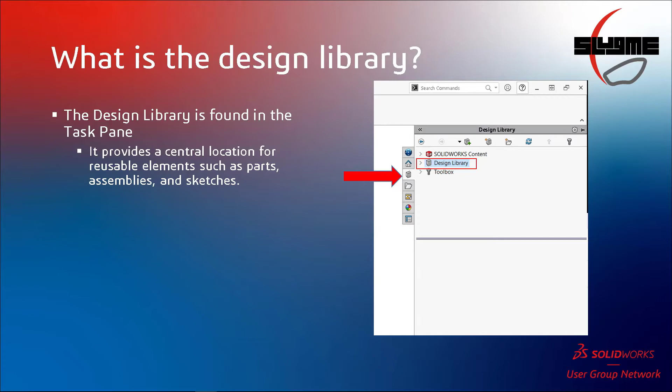So with that, where is the design library, or what is it for that matter? Well, it's really just a location that is found — a folder that has subfolders within subfolders — found in the task pane, along with the SOLIDWORKS content section with the toolbox. You should see the design library out of the box. But if you don't, I'll show you how you can add that, or you can even add your own additional folders. All it is, is just a central location where you have all your reusable elements, such as parts, assemblies, sketches, annotations. You can also customize it as much as you want. You can have multiple folders, directories, and then share it with your colleagues, with the different users within your organization.

There are some file types that do not belong there, that are not recognized. I'm going to talk about which they are as well. But let's concentrate on what we can use, right?

So what if it's not in the task pane? What if you open up SOLIDWORKS, you went through a change or a modification to the installation, and you no longer see it? This right here is the default location where you would find the design library. It's a folder that already has a group of subfolders, categorized by annotations, features, parts, assemblies. We even have some additional tools for routing purposes, for sheet metal purposes, etc. So there's some different examples, and if it's not there, you can easily just add it.

There are a couple of ways to add the location of that default design library. If it's not there, this is a good way to do it using the Add File Location button. You simply browse for the directory, select the top level folder, which is Design Library, and you'll be able to see it there. There's another way through the Options menu to System Options, which I'll show you later as well.

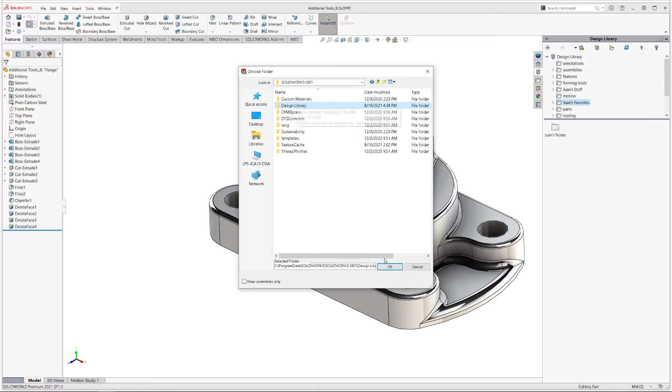Now, as I also said, if for some reason you go through an update, an upgrade, swap machines, or a new version of SolidWorks, and you don't see the design library here, you can simply add the file location of that original directory, which is under program data, SolidWorks, whatever version you've got, and then just point it to the top level folder. Hit OK, and then you'll see that directory here.

You can also access or assign this location under your tool options.

Under file locations, there's a section here for design library, and you can see it's the same directory there. So yeah, you can have multiple. You can also add a network or a shared folder, so it's up to whatever you prefer.

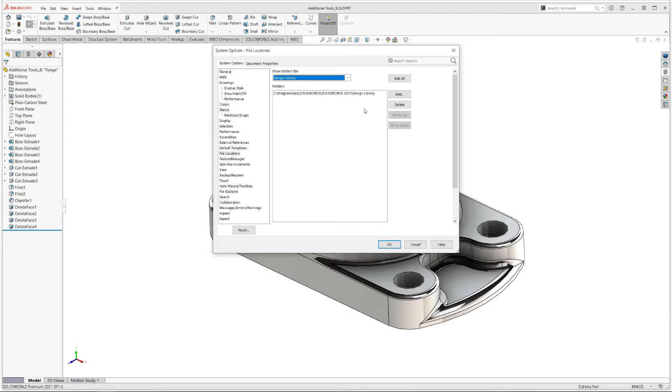The idea here is to have access to this folder that already exists. You can have a little pre-created group of files, and you can use those or derive some from there. All right, so what are they used for?

So for instance, if we go to the annotation section, here you can store any sort of symbols like your tolerance information, your weld symbols, your surface finish symbols, any notes for that matter. I'll demonstrate how you can use those in a drawing environment.

So you can quickly save them there, and if you need to use them, you can simply drag and drop them instead of having to go and find them. If it's something that you commonly use, you can simply go in there and assign it. Of course, here I'm putting it on a surface of a 3D model.

If it's a note, you can go ahead and save that into a note, or create a text here, add a note, and then just save that into that folder. I'll go ahead and demonstrate how to do that, but it's something as simple as adding those files there.

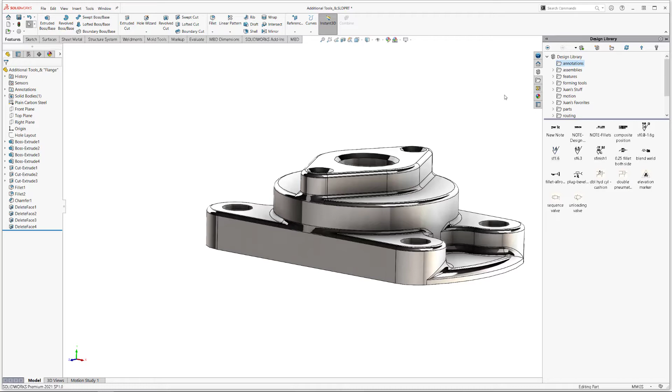All right, so let's take an example. How can we use this? Well, if we go in there, something very simple - if I go in and create a sketch, for instance, here I'm just going to go ahead and create a simple block.

I would extrude like this, but I know Toby Snart is watching, and he always makes sure that his sketches are fully defined, so I don't want to go ahead and upset Toby. So here we go, we got a fully defined rectangle there. Just simply going to go ahead and extrude that.

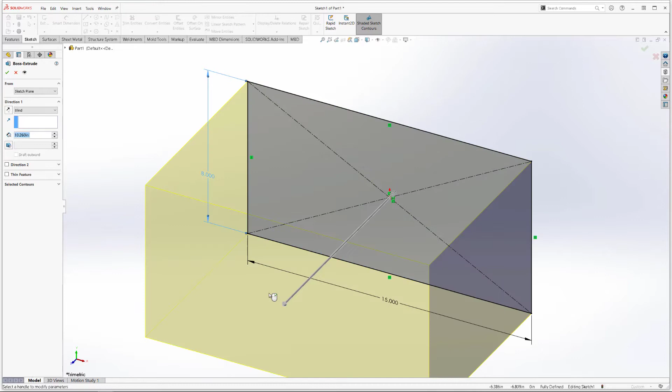Again, I'm just using this as maybe a foundation here as a way to save some geometry into the library. I'm going to save a sketch. You can also save a note. You can also save a feature.

So I'm going to demonstrate using this block. So what do I do here? Well, I want to go ahead and create a sketch on this surface right here. Okay, it is important on the surfaces that you create.

I'll show some examples where if you do not want to have any external references, if you want to go ahead and be able to locate the feature or group of features, or if you want to locate the sketch or the annotation, it's important that you think about those external references.

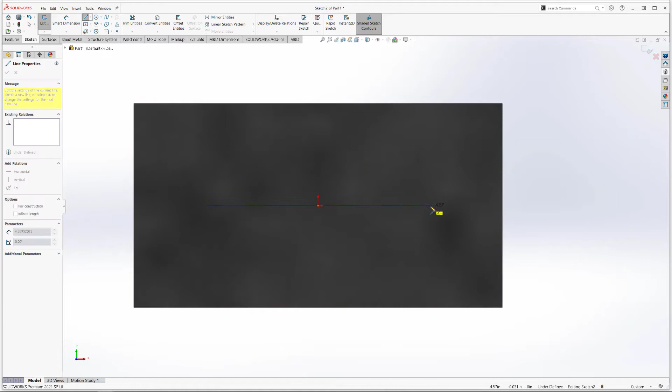But to make things very simple, all I'm going to do here is just simply create a midpoint line right from the origin. And again, want to make sure that we dimension this. Smart dimension, let's make that 10 inches. And then I'm going to make that construction.

So here's a little quick trick here. I want to make that construction geometry because I want to add a - for here, I'm just going to do a quick cutout. So I'm going to use my text, use that as a guide curve on my curve section. And then let's do SLUGME.

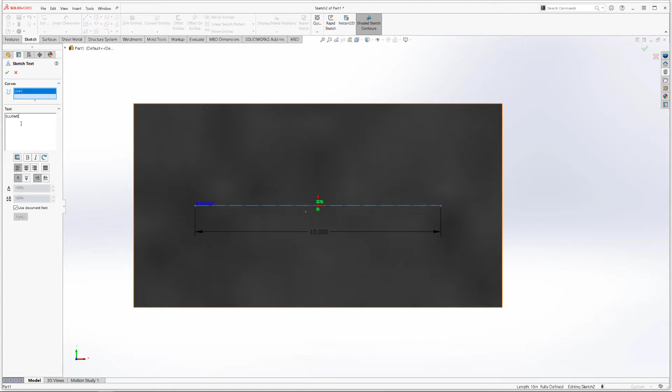All right, so just stretch this out a bit. Let me see how 2-inch letters look to me. Yeah, it's kind of big. So let's go to 1.5 inch.

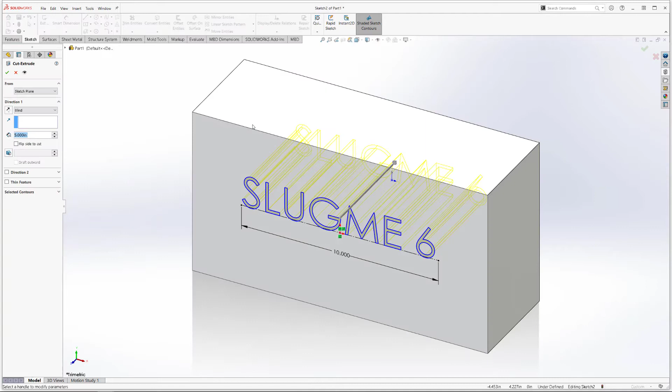All right, perfect. So here I'll go ahead and just simply do a quick cutout using my shortcut bar. I'm going to right click here to make sure that it's going through all, right click again to accept, and I do want to go ahead and just create that geometry there.

So lots of things happen here, right? So I made a quick sketch on this surface. It's fully defined with respect to the line. Of course, the text is not defined - that's why you got that underdefined, which is fine. And then I was able to use that sketch to create this cutout.

All right, so there's a difference between saving a sketch versus saving a note. So a note - what is a note? Well, if I go into insert annotations, anything that's here can be saved into the library as well, not necessarily into that annotations folder, but it's convenient that we already have one.

So let's say I add a quick note here, and the note can be on a surface or on the screen, doesn't matter. This is going to be just again SLUGME 6, but I'm going to call this one note. So I got two things - I've got the sketch, the feature, and then the note, right?

So how do we save stuff into the library? We select the location where we want to put those. So if I want to create... notice that I don't have a folder for sketches, right? So let's say I want to create a folder here and call it simply sketches.

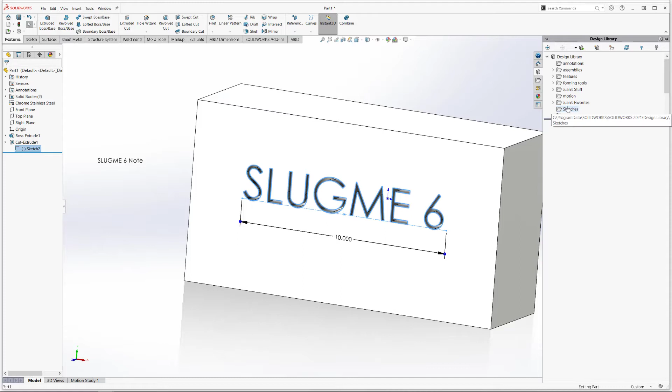Okay, so I want to save a sketch into that folder. What's a sketch? On the tree, it's already there. So I simply select the sketch I want to save, select the location, and say add to library. I'll call this one SLUGME 6 sketch. You can see some other items I want to talk about in the near future, but this is going to be saved as a block, because it's just a simple sketch. That's all it is. Where is it? Right here, SLUGME sketch.

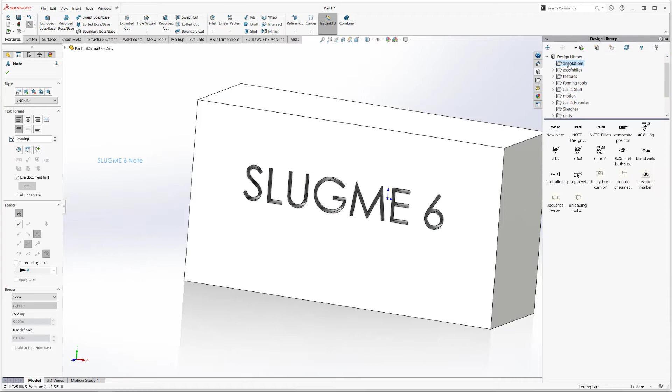I also want to save this note. So how do I do that? I click on the note itself, and this time I'm going to save it under annotations, and do the same thing. The note is selected, I'm going to save, add to library. I'll call this one SLUGME 6 note, and then it's going to be saved. Notice, as a note, it's not going to be a block, it's going to be a note. It's going to be right here.

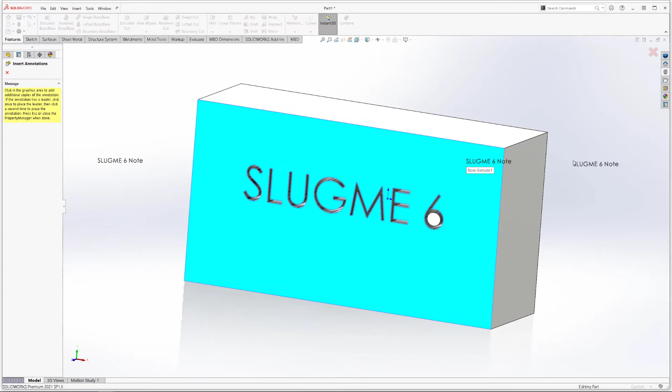All right, so how do we reuse those? Simply drag and drop. Notice that it is a note, you can reuse it. If I want to attach that or add a leader, being a note, I can select it, and I've got the same exact options as you would normally do with a note. You want to attach it to a surface, you want to attach it to an edge. Of course the arrow and the leader changes, but regardless, it is a note.

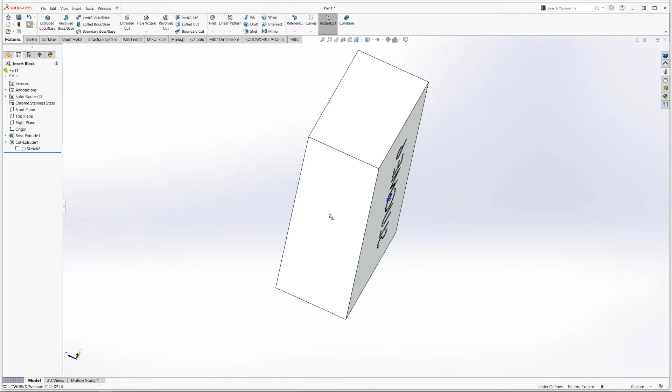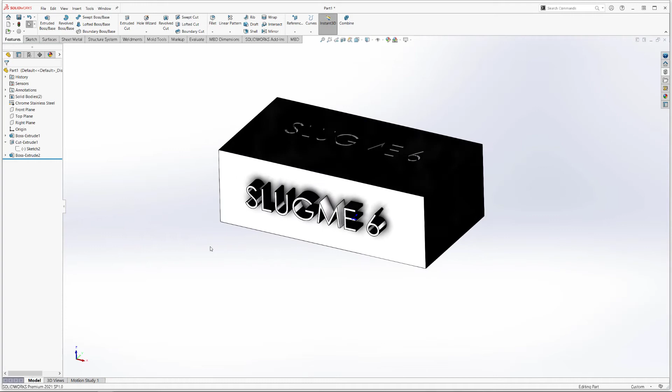Okay, what about the sketch? Well the sketch itself, let me put it here - so it's a little bit shiny. If I go to my sketch folder, drag that over here, notice that I can go ahead and drop that in the surface as a sketch. So if that's the case, now instead of cutting, I can simply maybe select to extrude that - not that much, but it'll be extruded like that. So again, it has the advantage of just being a sketch, and you can use it to do something completely different.

But if you wanted to save this as a cutout, now you're saving the entire feature. So instead of selecting the sketch, you select the feature itself. In this case I'm selecting the cutout, and going to a different folder. It really doesn't matter where you save it, so I'm going to save it here. I'll add it to the library, and call this one again SLUGME feature, and it's going to be saved as a library feature part.

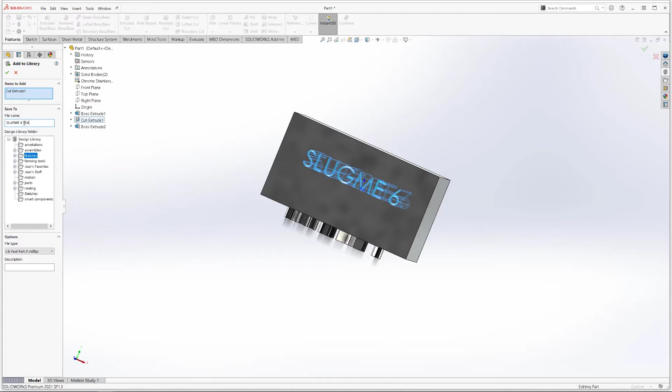Okay, again another type of item, because I'm saving... you can either do one single feature, or here, if you wanted to save multiple, you just select whichever features you want, and it'll group them together. All right, and I'll show a couple of other scenarios. So for the name, because I modified it, let me call it 6 feature. Notice that now it's going to be saved as a feature.

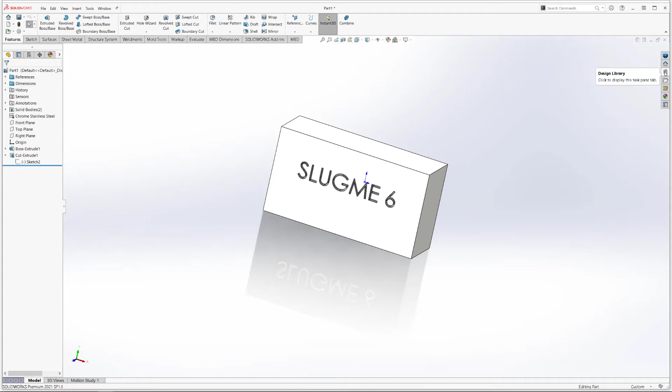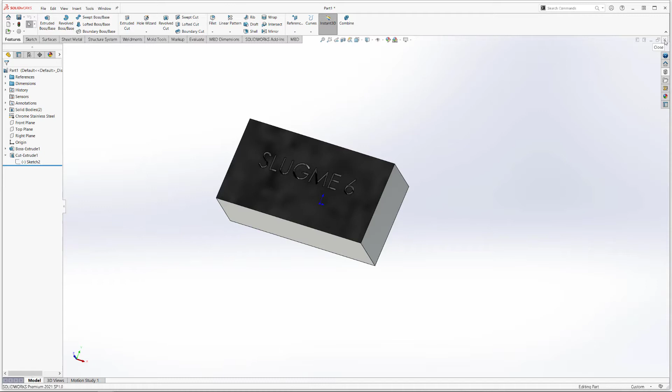Okay, and if I want to test this out, I'm not going to save this right here. By the way, this is something also very important. I've got a part that I used to create a note that I already saved and deleted, right? I also created a sketch, and then used that sketch in my library, which is here. Notice that I deleted that feature as well. And now I just saved a feature that is using the sketch - unrelated, but now that feature is saved here. I don't have to save the part, because I don't need it. I just used the part to create this geometry.

So how do I test that? Well, let's just make a new block here and do a quick test just to see. It is going to be looking for that reference, the reference that I used to create it.

And again, just something real quick here. I want to do it bigger because I think the overall dimensions were a little bigger. So do that. It doesn't matter the thickness because remember we used cutout through all.

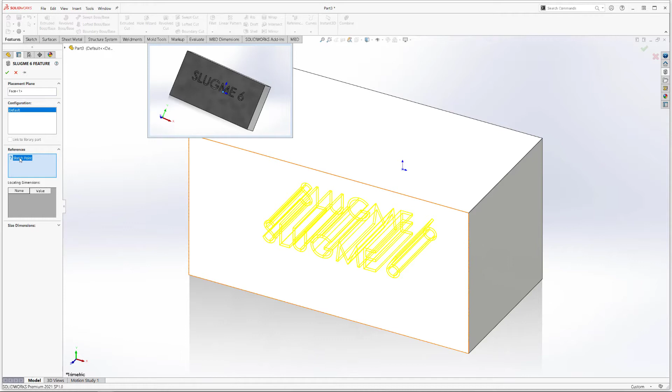So now when I drag that over, it's going to go ahead and look for a reference. Why? Because I attached the original midpoint line to the origin. So all I have to do is select that, and it'll go ahead and create that cutout, right? And it's throughout. You can see that there. So it's as easy as that, right?

So that's the advantage of this, instead of having to recreate all this work, might as well save this. Again, we used three different scenarios here: annotations, a sketch, and also the feature. So it's something that you can go ahead and save.

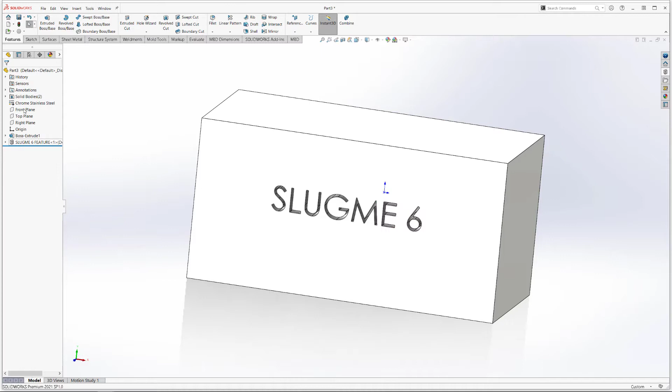Now, when you're using this, notice that it has a library feature icon on the feature tree, which means I can go in there and edit the feature. In this particular scenario, I don't have configurations, but I could have created alternate configurations. There are several files I'm going to show with examples on configurations, but I could have done that. And notice that if I need to change my reference point, if I want to select another point, perhaps I could just go in there and sketch a new point, put it in a vertex.

Of course, this is going to give me an error message, but it's looking for just a position where I'm going to reference that midpoint line. So just keep that in mind. You can still go in and make those changes.

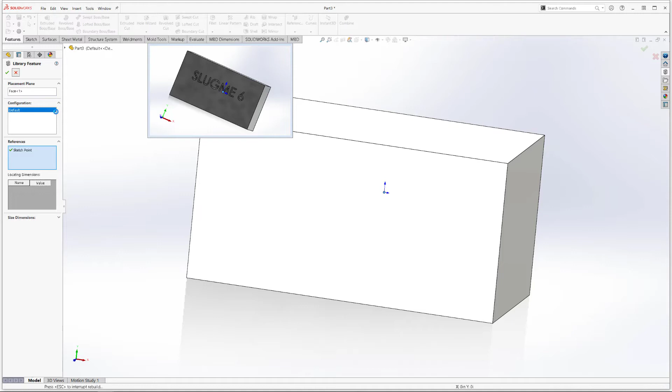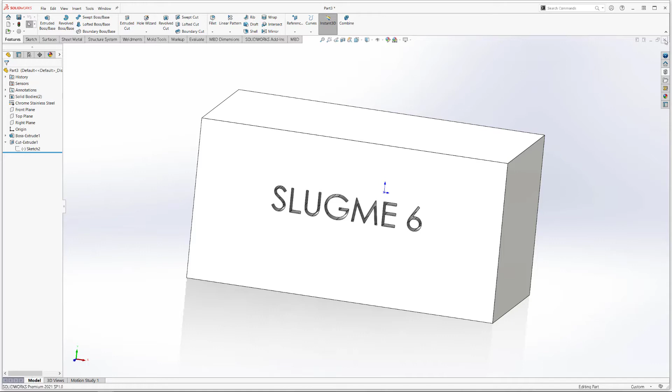You can also choose to right click and dissolve the library feature. When you do that, it just becomes its own cut with its own sketch, with no relation to anything. I can't go in there and if I had any other configurations, I can't change that anymore, or anything along those lines. So, very simple, something simple to keep in mind. It's just a way of creating these very common procedures that we use: annotations, sketches, and in this case, features.

Okay, let's show a couple of other examples on different features. So now that we covered the annotation section, I'll discuss that more in detail when we get to the drawing section. But we did an example of a sketch and a feature.

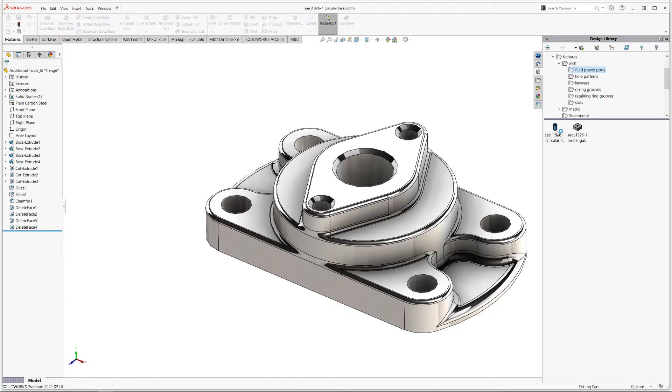Some of these features that are already out of the box, such as this fluid power port, for instance, notice that if I open that original library feature part, this one already has multiple configurations here. What are those configurations? Well, they're just simply different sizes of the cutout.

Now, in this particular library feature part, the feature that was saved is one single feature that was saved as a library feature part, but it contains a sketch. It also has a reference plane and a reference sketch.

Why? Well, notice that just to go back in history a bit, we have just a default cylinder that was built just to make the features that were saved, just like I did with the block, right? So if we look at this sketch, this is the first thing that was added. First of all, it was added on this surface right here, right? So keep that in mind.

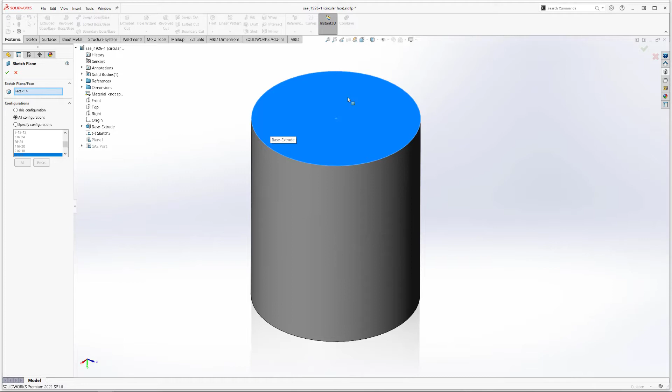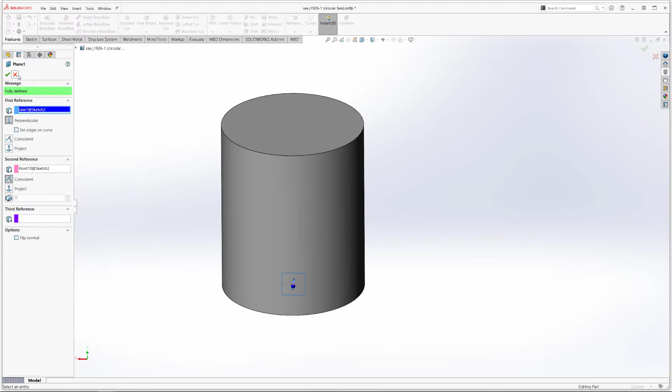Then when they added this sketch, they added a reference concentric to the outer edge. Notice how it's highlighted there. All right, so far so good. Then from there, they used that sketch to create this plane. Notice that they used the line, one of the lines from that sketch, and the sketch point. So that's how this reference plane was created.

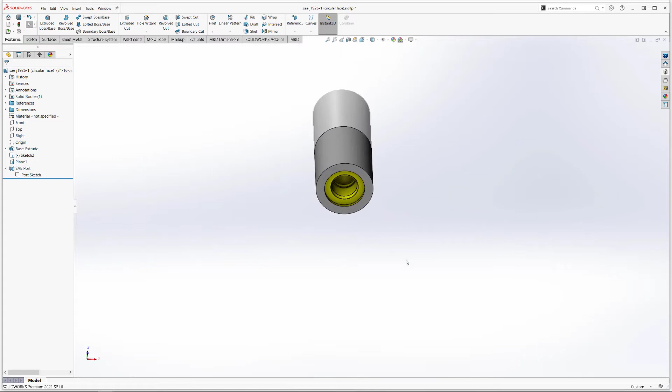So that's how this was done. So when they saved this, they pretty much just control-selected all the geometry that needed to be saved, or shift-selected, and then they went here and saved this as a library feature part. How do we use that? Well, let's go ahead and pull up an example here real quick.

So if I go and bring in this feature right here, notice that there's even a description there.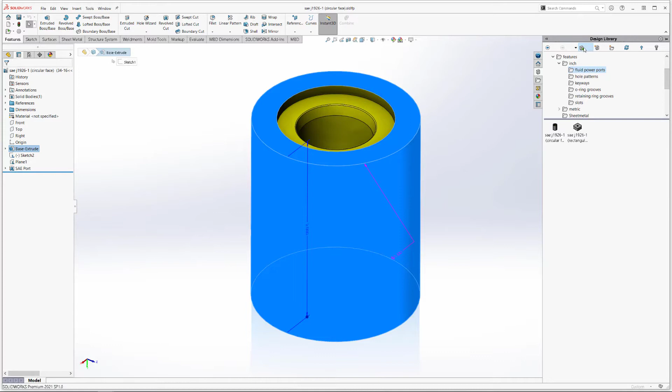There's a description box you can also add when you save this library feature. I'll open it again so you can see it. When you create this library feature, say I wanted to save that, notice there's a description here.

That's how they added the instructions: drag and drop onto the circular planar face, then select the circular edge to locate the feature. Remember everything I mentioned before. If I drag that over into that cylindrical face, it now found that original plane or face for the original sketch, the one with that little cross with a point in the middle.

All right, so from there, it's asking me to select the configuration. How do I know that? Well, because there's nothing selected and I don't see an actual cutout there yet. So I go in and select this one as an example, and this one has different configurations as I showed.

As soon as I pick a configuration, it's looking for references. If you recall, that center point of the sketch was concentric to the outer edge of the cylinder. Now it's looking for the location of this cutout and that reference. This is just an image giving instructions on what to select, so I'll select this right here, and it's going to locate the cutout from that feature.

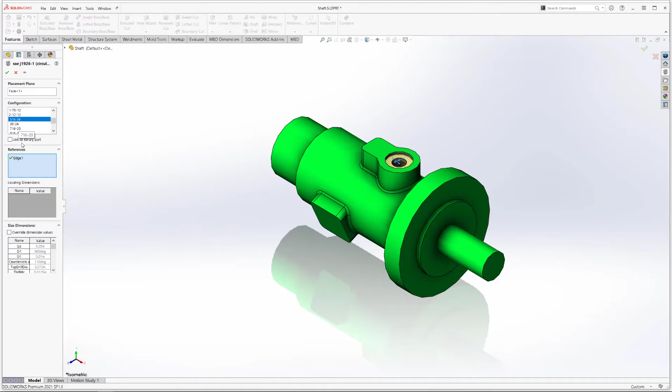I can still go in and change the configuration or make a different selection if I need to. There's this link to library part section where if I select that, any future change to this original part that affects this configuration will update here when I open this part, just like a part in an assembly or drawing. If I don't check that box, it doesn't matter what this looks like anymore, it's just an instance, a copy living in this file.

It's still going to be a library feature part as I showed in the previous example. I can go back as a library feature part and modify the size. This is way too big, so I can change its size, and that gives me the advantage of keeping the configurations from the library feature. If I decide to dissolve it, then I can no longer select individual configurations.

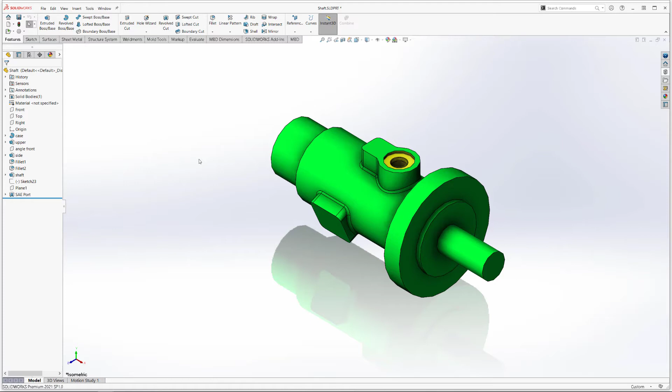So far so good, I hope this is a quick way of explaining why those references are located. There are a lot of other examples here you can take advantage of, reuse, alter, modify and make your own. There's nothing that's going to prevent that from happening.

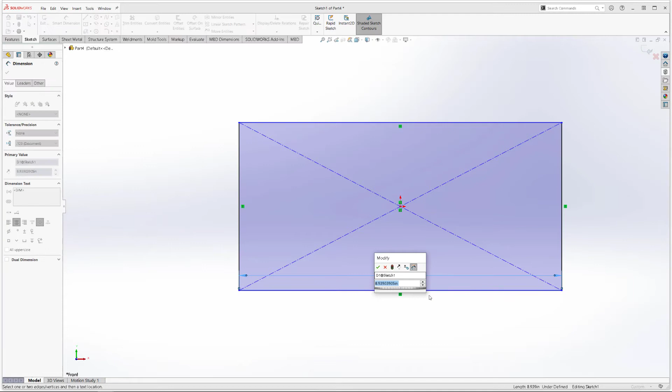Just to show you an example, I'm a huge fan of those boxes, very simple to create, that's why I'm doing this, just to give you a quick idea on how to make that happen. Let me do something different this time. Instead of using a block, I'm feeling a little happy today, so I'm going to create a happy face.

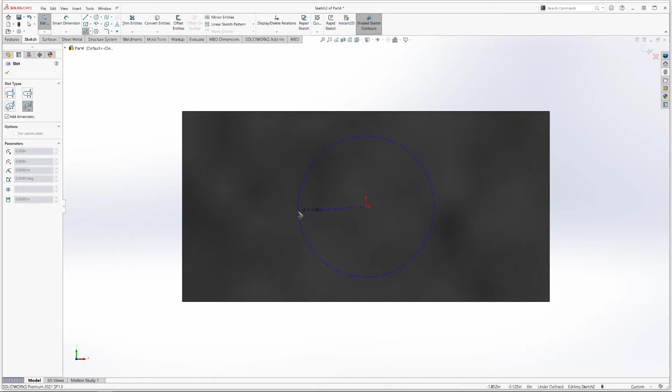Let me go ahead and make this box. I'll make a new sketch there, and actually let me use the center point so I know exactly where it's located. So let's say I do this little smiling face, and then add some eyes there.

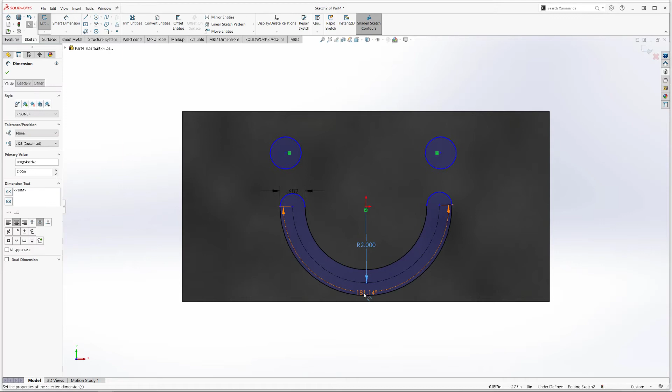I can go ahead and create some quick relations, making sure those two are horizontal. Let's go ahead and add that. Notice there's already a dimension there, so that's two. Let's do 180, a whole 180, and then right here I just like even or sensible dimensions.

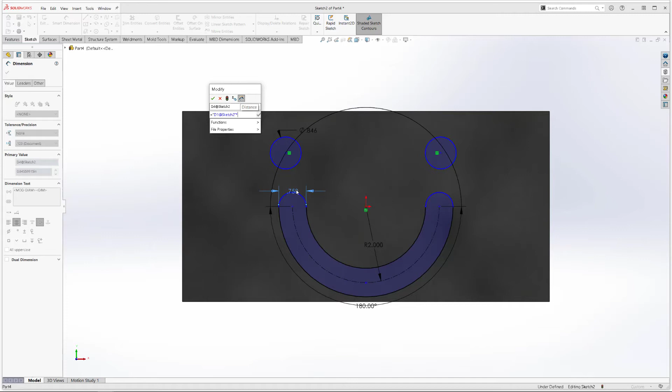So to do that, just a quick FYI, what I can do here is make that equal to this dimension times 2. In case you didn't know how to make equations in SolidWorks or use equations, that's just the way it is. It's a little big, but that's fine.

Okay, make sure you always define your sketches. So I'll do that. It didn't like one of those relations, so it might have been this one. There you go, so it's a done deal. We're good to go. So what I want to do now is make a quick cutout.

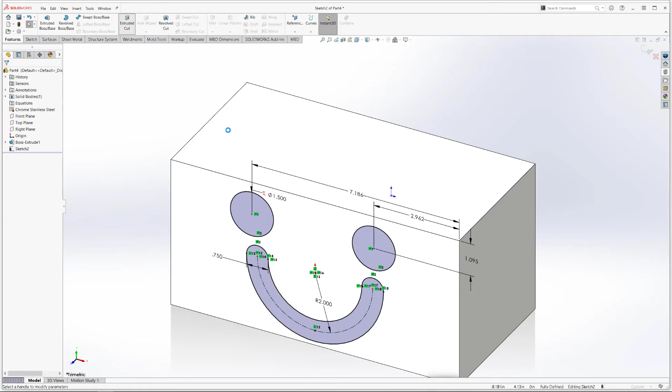Okay, and let's do through all. So this is just a quick happy face there, and I can alter it. We know that we can alter those dimensions, and then of course it's going to go ahead and change our geometry accordingly, right? Here and here, etc.

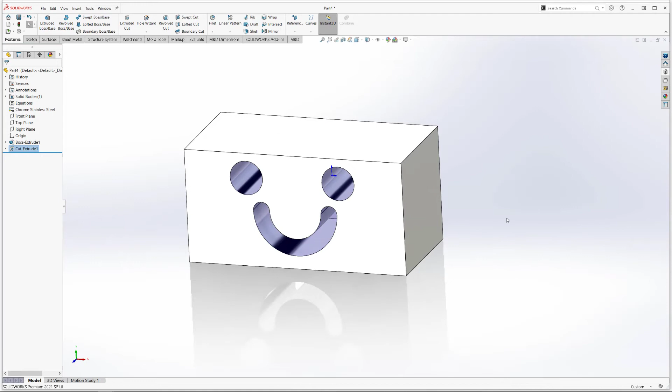So let's undo all that. So let's configure some of these items here. Now, how do we configure? I'll make a quick configuration.

So let's do this. If I go in here, I want to do two things. I'm going to make sure that's still two, and I'm going to configure this dimension, and that's it, because remember, this is driven by that. So that's all I want to do here. So I can right click and select configure dimension.

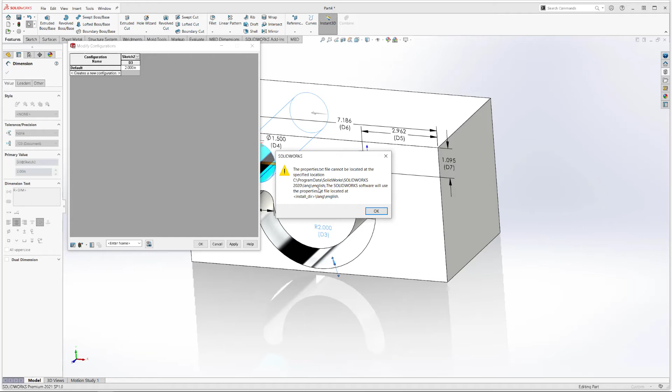A lot of you might come across this message right here. What is this about? Well, it's saying that the property text file cannot be located in this location. It says 2020, but I'm using 21. This happens sometimes when you do an update or upgrade, and this might not be updated appropriately.

Let me show you a quick shortcut on how to fix this really quick. If you go to File Locations under Tools Options, and then Edit All, you can go down the list and look for anything that says 2020 and change it to 2021, right? Easy. But you can also do Find Replace and find everything that says 2020 and replace it with 2021.

Uh-oh, not 2121, a few years for that. And then we can go ahead and replace. Find next, you can see that's one of them. So I can go ahead and replace, or I can just replace all, and then it's going to show me everywhere this was replaced.

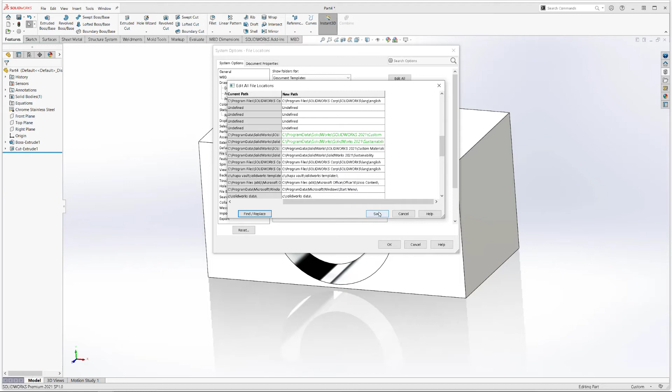And that being the custom property list is one of them. So I can simply save that. Yes, yes, yes, yes, all the way. And now, if I repeat the process there, I just took care of that problem.

Okay, no longer there. All right, so let's go ahead and just do a quick configuration here. I'm going to pick those two dimensions, and I'm just going to call this one happy face 1 and then happy face 2. So let's just do H1.

What did I do here? Let's click again here. Okay, so let's rename. Messed that up there—H1, happy face 1. And then H2. I'm just going to do two instances, right? Because that's what I want to save. Notice, easy as that, you save two configurations.

We can make this a little bit bigger, 2.25. I don't even know what that's going to look like. And then this can be maybe half. And then let's do this 1.75, and let's do this 1. I'm a little curious to see what happens there.

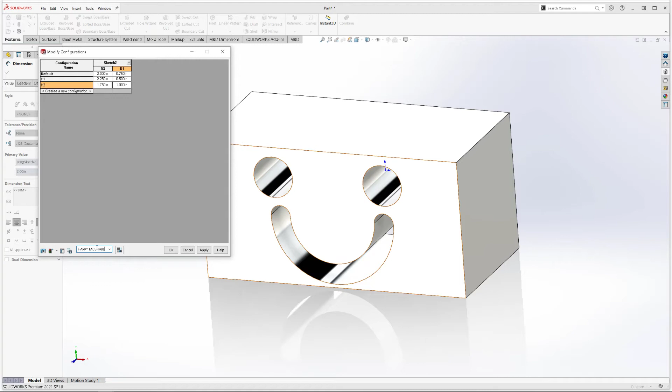Now, here's another quick trick. If you want to save this table, so that you don't have to go and choose or repeat the process, you can simply—I'm going to call this one happy face table—and then save that. So I can go ahead and recall it if I need to retrieve it.

So what did I just do? I just created this configuration. I had a feeling that one of them was going to be too big or too small. Actually, both of them were. All right, no problem at all. Let's just recall the table.

Let's just make a very small 1.875, and then let's make this one 0.75 and see what that looks like. Actually, this one didn't work either, right? So let's just do 2 and 1 and see what happens.

Okay, that one works. What about this one? This one, it's not working. So let's do 0.875. I just want a little variation, and I think this one's going to work now. Let's rebuild. Yeah, it does.

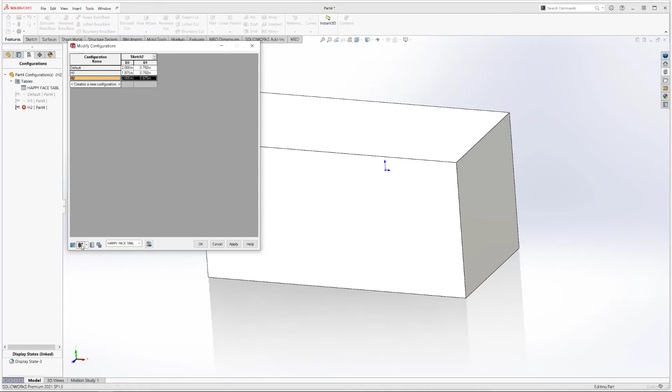Okay, so I'll apply and change. So I've got those variations here. Now they're different—you can see they're all different. Okay, so what I want to do now, I'm going to save this feature.

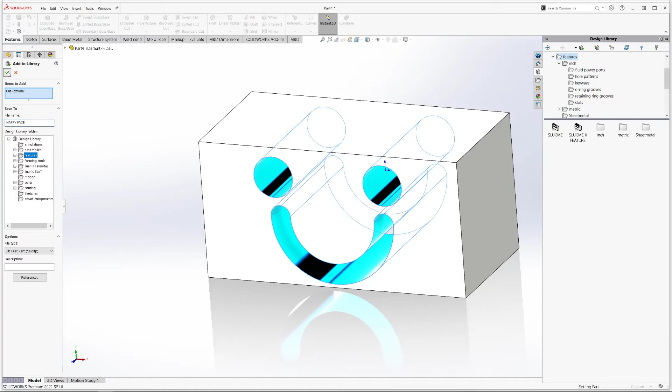Remember, it's configured, so I'm going to save that into here and call it a feature. I'll add that and call it happy face. Okay, that's a library feature part. So what is that going to do? Well, that's going to save this happy face as

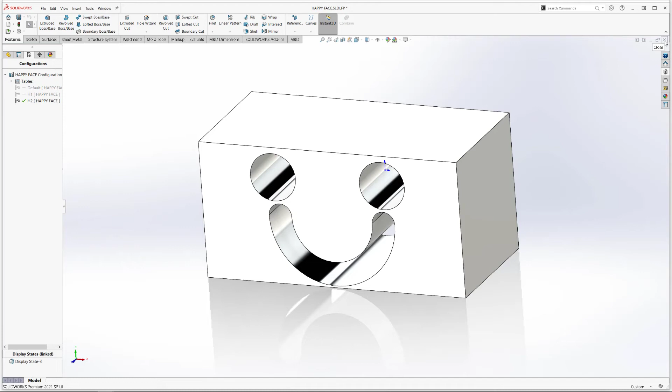a configured part. So if I open it up again, notice that it's going to show me all the different configurations that it saved into it. That's how you go in: you first create it, add your configurations, and then you're able to save them like that. So easy enough.

So what else can we do? Well, we can also create some smart components. Smart components are useful because they allow us to create, for instance, this component here—very quick example. This is a smart component. I brought it from the existing smart components that are here. If you go to parts, there are already some smart components under the parts sub-folder, and this is one of them.

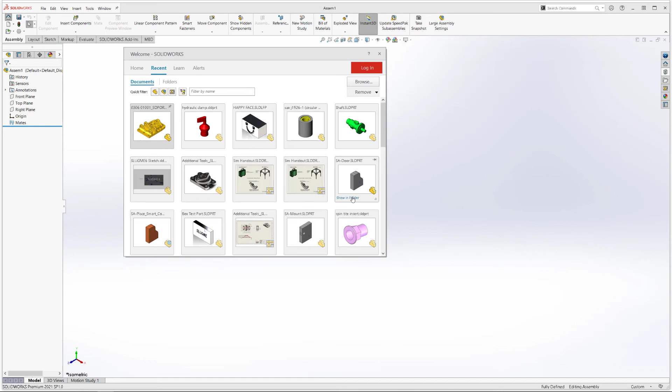So what that does—if I use that in an assembly, if I go make a quick assembly and use that part—let's just insert a component here. I know I had a part ready here, so let's find the easy way. If I drag that over as a part, that's my first part, and use that. Just notice that I can drop it in here.

Select the configuration. So what did that do? Right now it didn't do anything, right? If I click there and then isolate, it didn't do anything—it just mated it, because it had a mate reference.

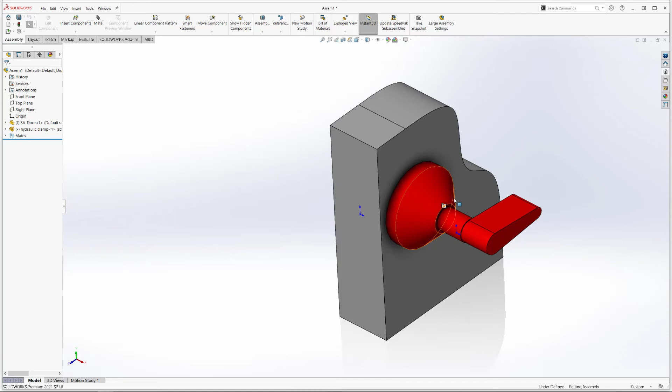Notice that this part right here has a little lightning symbol in it. If I click on it, the lightning symbol appears here. And what does that do? No other steps other than clicking on it. If I click on that lightning symbol, notice what just happened. If I isolate now—voila.

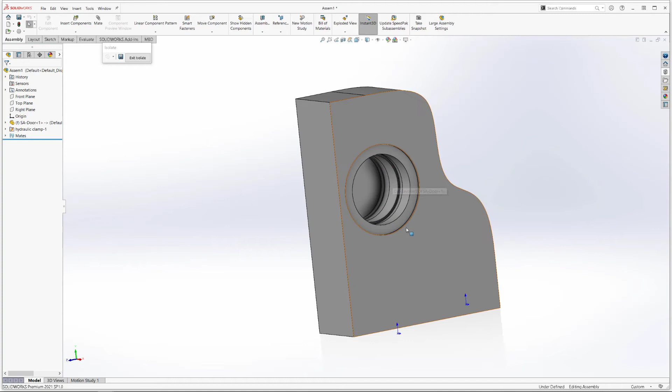So that's something you're able to do—all those cutouts, including any additional hardware. Again, you're just building onto that library. Of course, if I end up moving this, depending on the mate that I added—I just added that mate right there—if I want to move it out of position to a different location, or put it somewhere else.

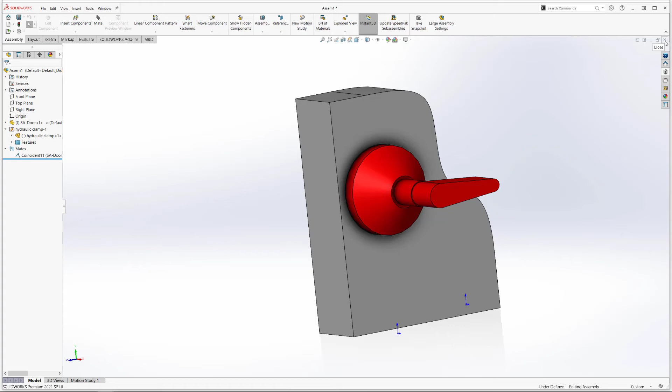Maybe swap it, or whatever the case might be, it's going to update the location of where it belongs. So it's just building your library, but you're also adding some smarter technology into the component itself. So how do you do that? Well, here's a quick sample. I'm going to show you a quick sample on how to create a smart component. You do need a resource assembly, like a sample assembly, like the one I've got here.

Okay, so check this out. We've got the door, or the blocks. We got the doorknob, the strike, and then the other handle on the other side, right? Now there are some features already here. So if I go in and isolate this, notice that there's already a cutout. There's another small cutout here and another cutout here, right?

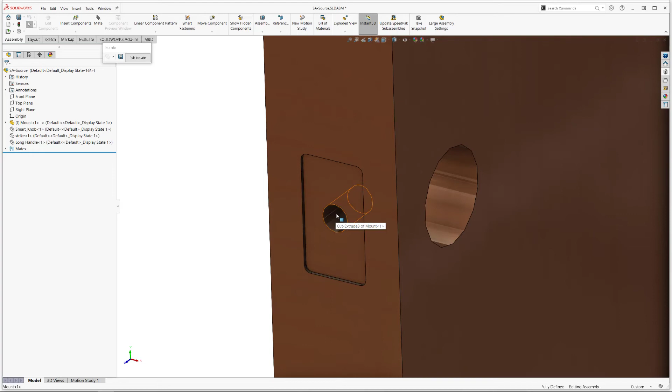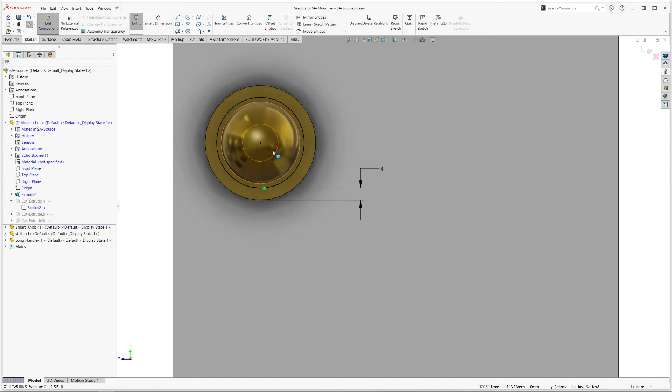Now it's important that those cutouts—like for instance, for the knob itself—the cutout is happening here, right? That's where the cutout is at. But notice that it's all in context. And if I go and edit in the sketching context, notice that it's derived to the actual doorknob. So it's pretty much like an offset entity from that doorknob profile—it's related to the doorknob, but the sketch is located here.

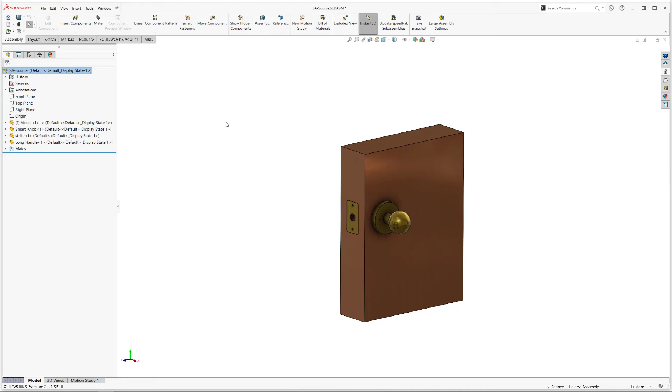That happens to this box, and also to the outer and inner holes there as well—this one right here, the little cutout. So we've got three different features on the original box, and then we have three components. So how do you make a smart component? You make a smart component, then you put it in the library. Now, if you've got configurations and smart components, that just adds another extra piece of lightning there, if I should say. So how do you do that?

You go out to tools, make smart component, and then you just select the component that you're going to make smart. So next time, if I want to go ahead and do all the hardware cutout and add the two pieces right here, all I got to do is simply drag that doorknob, put it somewhere else in another assembly, and it's going to make that magic happen. Okay, let me show you how that works.

If I want to include any components along with it, I can select them here. If I want to select any features, then I can click on the features here. So I wanted those two features, and I also want that cutout. It's going to go ahead and make all those cutouts the moment that I drop that doorknob.

Now all I have to do is save that component. Again, that smart knob, I'll save that over to my library under smart components. So I'm gonna call that one smart knob. And now it's there, the smart knob is there.

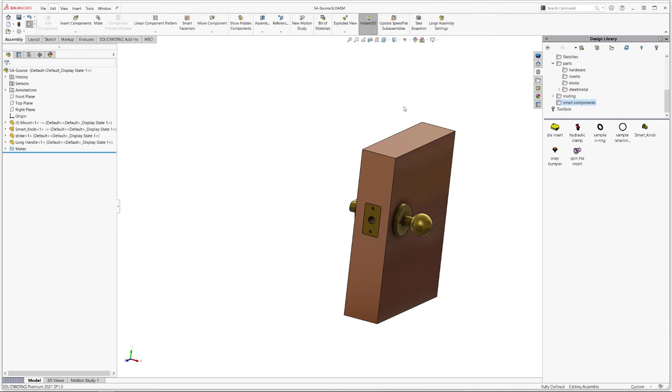So let's put that to the test. Once again, I go in and let's open up this assembly right here. It is an assembly, it has to be an assembly, it does not work as an in-context part. So that's an assembly, and it already has a partial door there.

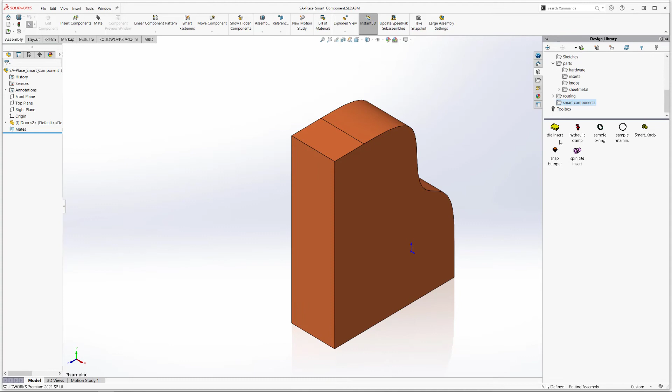All I have to do is simply drag and drop it, put it in place. I can mate it in place, I can reposition it. But notice there's no symbol here, until I click on that part name on the feature tree, that symbol shows up.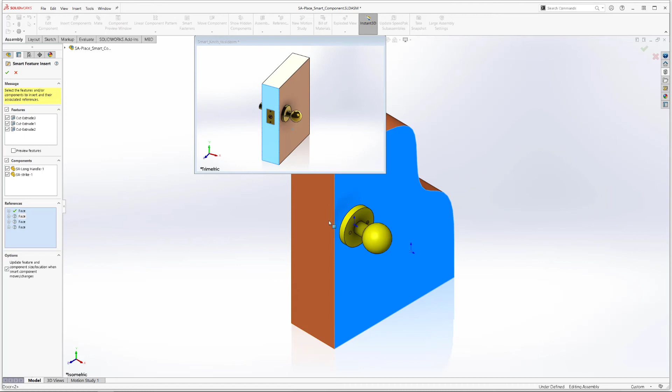And just like magic, what it's looking for right now is that surface, this surface right here, because it wants to know where it goes. The other cutout goes here, and then this one here in the back. So that's what it's going to do.

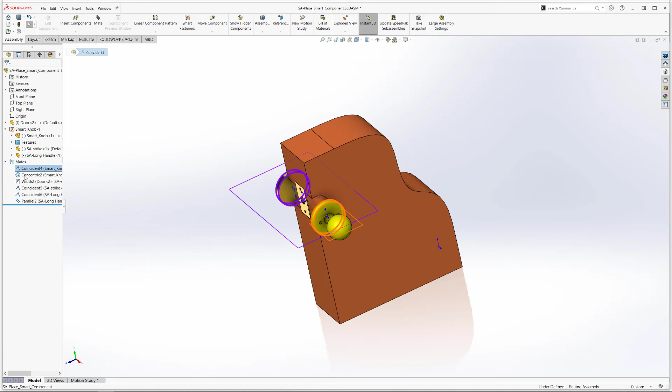Then what it's going to do now, if I simply hit OK, what it did... and need to maybe put it closer to the edge. It adds those cutouts. Probably have to modify the length position.

So I didn't measure that correctly, but what I wanted to show is the surface cutout there, the through cutout, and the hardware comes in there. So just a quick way of showing how that works out, even though it didn't make the cutout the way I anticipated, but that's just a quick example. It's just working smarter, quicker.

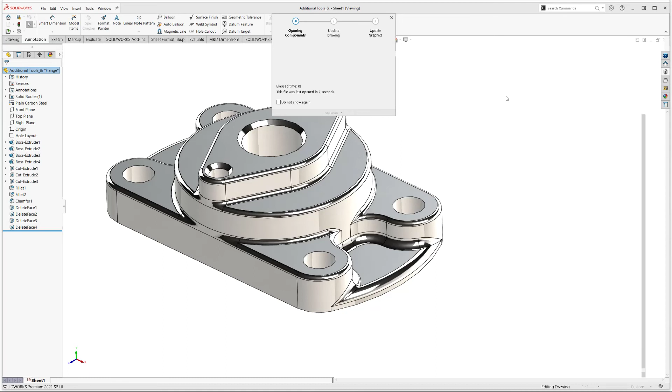In drawings, when you're working with the actual drawings themselves. So I know I've got drawings here. Here's another, and I'll leave you with this last tip, where if I do have a drawing, another way of using this annotations under your design library.

You can go ahead and save notes, individual notes, into the annotation section. Like for instance, I've got this note here. Okay, so there's a note there. There's another note here for fillets, and there's another one here that might go here. That's a new one that I just created. So they're just different notes that you might have here that you can potentially use.

Right now, what happens when you... let me delete those notes. What happens when you drop one note on top of another? For instance, I've got that there, and as soon as I drop this one, I want it to also add it and maybe make a list out of it. But notice that that did not happen right here, right now.

So why is that? Well, by default, under tools, options, under drawings, in system options, there's a checkbox here that says disable note merging when dragging. That's turned on by default.

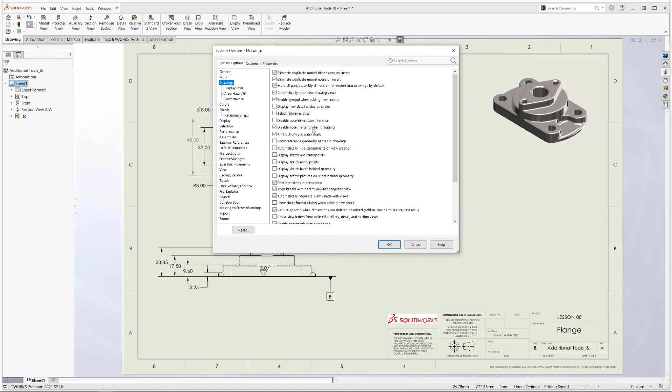If I click that off, notice that now I can go ahead and repeat the process if I've got that, and maybe I already have, let's say on that note, I can do that now. I can do that later, but let's say I have that as an actual item number.

So now when I drag and drop any other notes for that matter, like here, notice that it's going to continue to add into it and groups it together. Even this new one that I just added, it's a new test. That's all it adds.

So just a quick, convenient way of— you might have some notes that you use here and there. This is a very good way of making that happen, of maybe just combining or modifying the order and how those notes appear. That's just another great use for this. Now you notice also there's a forming tools folder.

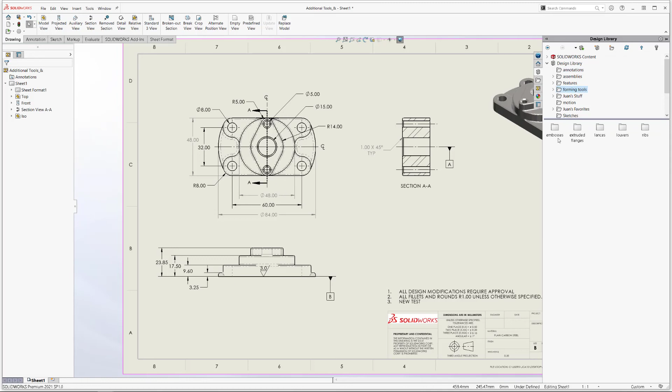This applies to sheet metal parts, and it's important because any component can become a form tool. Like this one right here - if I wanted it to be a form tool, anytime I drag and drop it, it's going to create all this geometry. It's just a matter of going into the sheet metal tab and selecting forming tool.

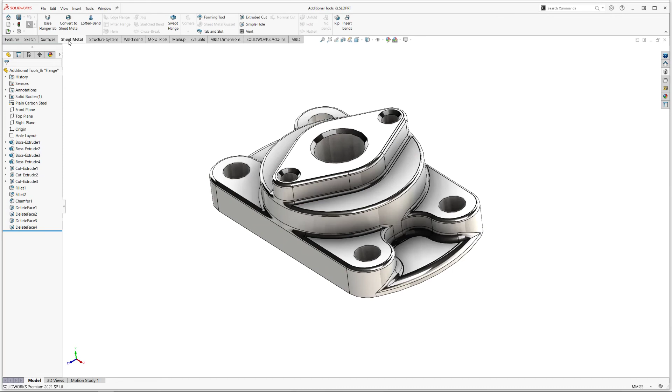It's looking for a stopping face right here, and faces to remove - maybe I can remove this one. And that's it. For the insertion point, I can select any geometry. It can be the center, it really doesn't matter. But now that's a forming tool.

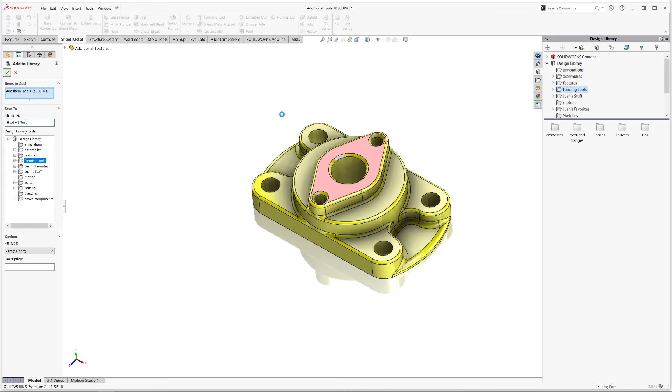Then I can save that forming tool, select the component, save it into the forming tools folder, and add that to the library. Into forming tools, I'm going to call this one test, SLUGME test. So how does that work? I promise this is the last thing I want to show, because this is a very useful application.

If I go and create something - notice my love of boxes - but this time I'll use it as a sheet metal part right there. Hopefully that's big enough. But notice if I drag and drop that into here, nothing happens. It's asking, do you want to make a derived part?

No, cancel. Why? Because if I have not assigned this as a forming tools folder, that's not going to happen. So all I have to do is right click on the forming tools folder, select forming tools folder, and make sure it's assigned, along with everything under it. Now when I refresh, I can drag and drop that in here.

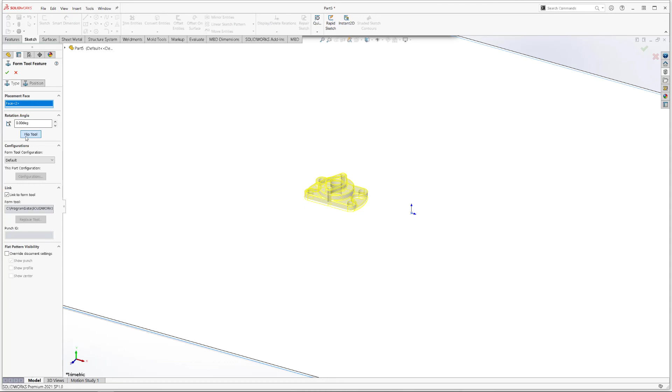Notice that it's going to go ahead - you can flip it over if you need to - but notice I can also choose a position. I'm going to leave everything as is. What it does is allow me to use that. I think it's too thick, so it has some extra geometry I can remove. But let me use one that's already there - for instance, this right here.

If it's too thick, that's a problem - the plate is too thick. So let's go in here and modify my plate thickness. Let's just edit my...

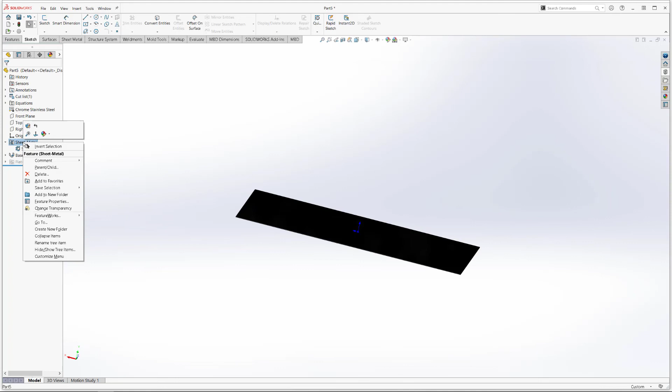And the radius is fine. Let's go and modify the base flange - it's actually thin, I mean I should have used a gauge table. I'll just do that. I'll use a gauge because I know these are super thin. I can modify the distance here, but I'll stick to what I know. So let's just do that.

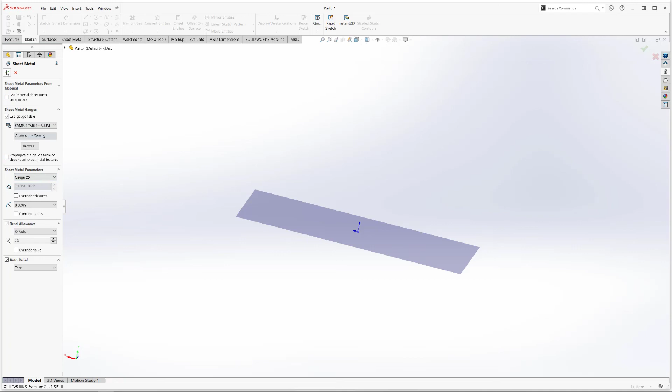Make that super thin, and then let's try that. I'll even try the new one that I just made. Yeah, that's going to be good enough. Notice that it's going to add that little bump in there, including the one I just did - that was the original problem, that it wasn't as big. So if I do that, it's going to resolve that as a form tool.

I think it has a lot of small radii, so that's why it's not working. But this is how you have to specify that this is a forming tool folder.

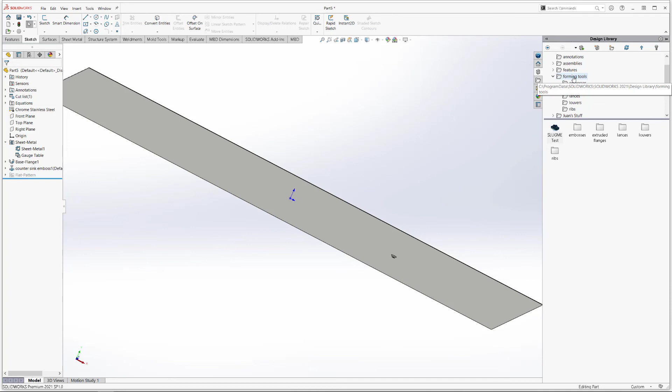That's it. So use of the library is very, very important - you can use it for many purposes. We just scratched the surface here, talking about annotations, notes, features, parts, even full assemblies, molds, etc. So take advantage of that.

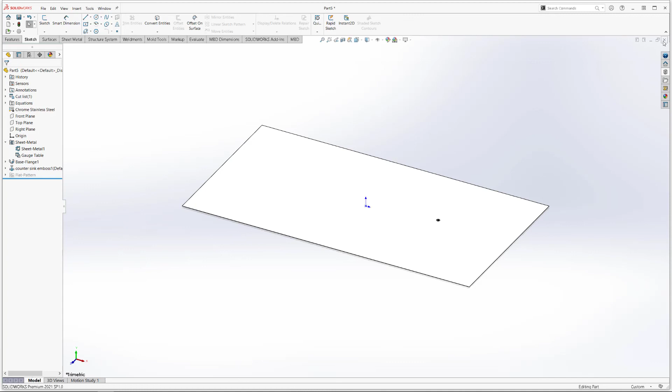Hello again, and welcome back. Juan, thank you so much. Muchas gracias - you are an excellent driver.